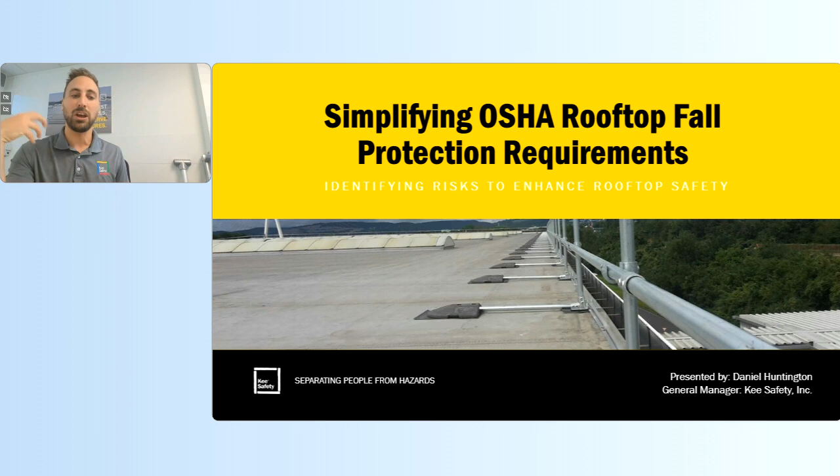And promise number three is that this is not a sales pitch. I am here to educate you. My goal is to give you the knowledge that you need to help separate your employees from hazards, specifically falls from height. If you work with us to protect those employees, that's great. But if you just take this knowledge and apply it, I take that as the win overall. So those are my three promises.

But what are our real learning objectives? What are we actually going to talk about? Well, I've climbed on a lot of roofs. I've been doing this for slightly over a decade. I'm not going to say how much over a decade, but slightly over a decade. And I noticed early on that it really didn't matter the type of roof that I was on. I kept seeing the same three hazards over and over again. If I was walking on the roof of a hospital or manufacturing plant or distribution center, I kept seeing the same thing. I kept saying the same thing and answering the same questions.

So we put together this presentation to address the top three most common rooftop hazards that I've seen, and that will exist on all of your facilities. We'll touch briefly on how to protect those hazards. So we'll address the hazard. We'll look at what OSHA says about it. We'll answer frequently asked questions. And then we'll talk about how to protect each hazard using some of our solutions.

And then the meta, kind of the overarching theme that I want everybody to pay attention to, is the order in which I present these hazards. As you walk away from this webinar, my goal is for you guys to all say, well, if I could do one thing to make my roof safer, what would it be? I want you guys to be able to answer that question specifically.

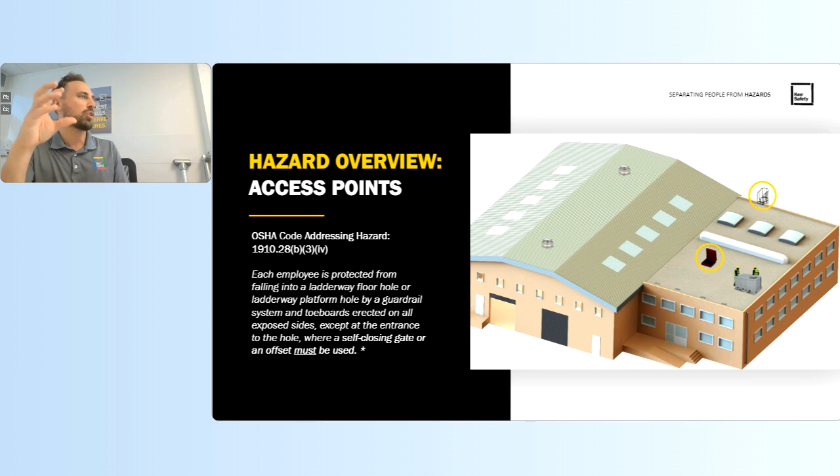And what you would most likely say is, hey, Dan, we've got some units near the roof edge. We really need you to protect them. And I would say, absolutely, we'll take a look. We need to protect those areas of your roof. But before we get there, the first hazard that I want to talk about on your roof is the access point. That's the first area that we need to address when it comes to fall protection. I'll get to why that is in a second. But first, let's just break down the code itself.

So where we pull this code, I'll give you guys a 20-second crash course in OSHA. So OSHA stands for the Occupational Safety and Health Act, or Occupational Safety and Health Administration is the enforcement branch. OSHA has basically two books. You have a general industry book and you have a construction book.

The hazards that you come across in general industry, which is the maintenance of the facility itself during its lifespan, are totally different than the hazards that you're going to come across during construction, right? We are in a facility here in Buffalo, New York. We don't do a lot of overhand bricklaying as a day-to-day part of our operations, right? And when you're doing overhand bricklaying, you're not really worried about ergonomics and lighting. So there's just two totally different books.

We're referencing 1910.28. The .28 means that we're talking about the fall protection chapter in general industry. So you want to Google it. I tell everybody, Google these codes and read them for yourself at OSHA.gov. Now, you may be watching and listening and say, oh, no, I think you're wrong. I think that the OSHA code is 1910.23. And you wouldn't be wrong. That was what the OSHA code used to be.

Back in 1977 to 2016, it was 1910.23. Then they updated the code, and now it's 1910.28. They didn't retire the jersey number, which really is confusing. So you can still look up 1910.23, which is now the ladders requirement. So that's your 20-second non-accredited crash course in OSHA and understanding the codes.

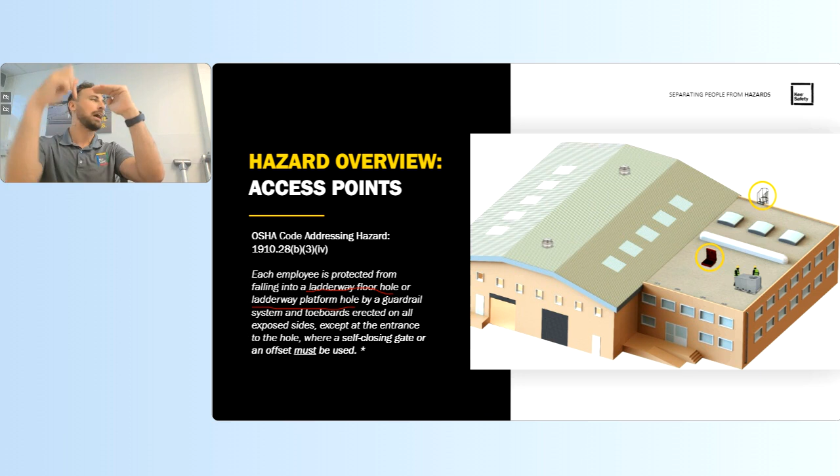A ladderway platform hole, the roof is a platform that I'm stepping onto and off of. It's my work platform. The fixed ladder on the side of the building is my ladderway platform. And the hole is where I'm climbing up and through the openings in the ladder to make access. So it's saying if I've got a hatch or if I have a fixed ladder, I need to protect it. I need to protect it by using guardrails and a self-closing gate or an offset.

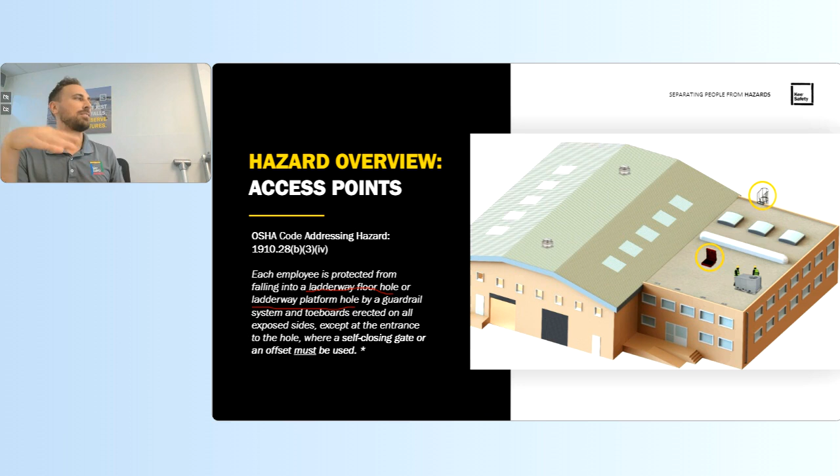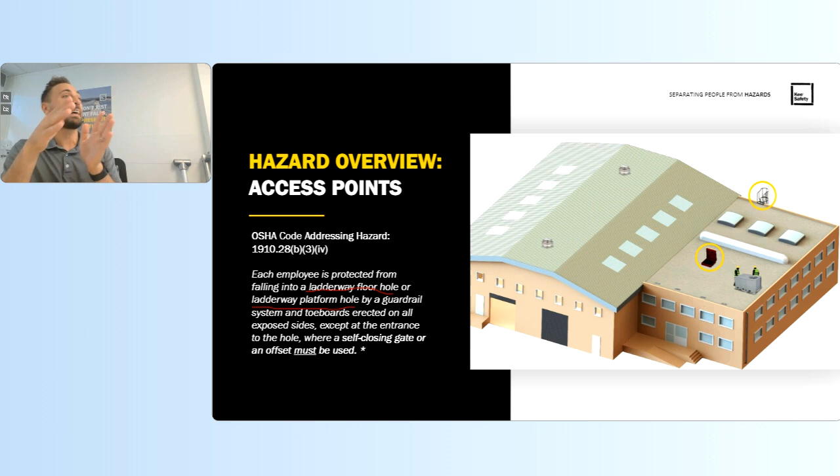Offset, simple to understand. Picture your guardrail as like a turnstile at a bank. So I can walk up to the guardrail, I turn right, I turn left, I get onto the roof. We also like to design these as like a cattle chute to the middle of the roof. So you have guardrails that bring you to the center of the roof. So that way I can engineer my footpaths from the middle out, so we don't have people walking along the edge and end up in a precarious situation. So those would be examples of an offset.

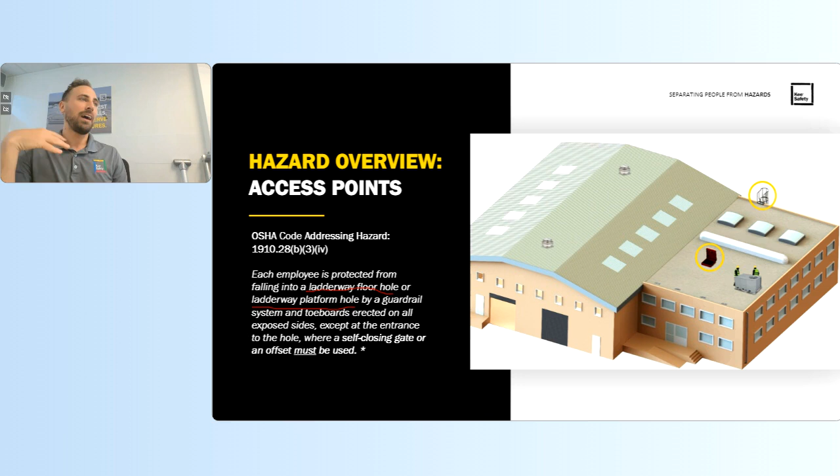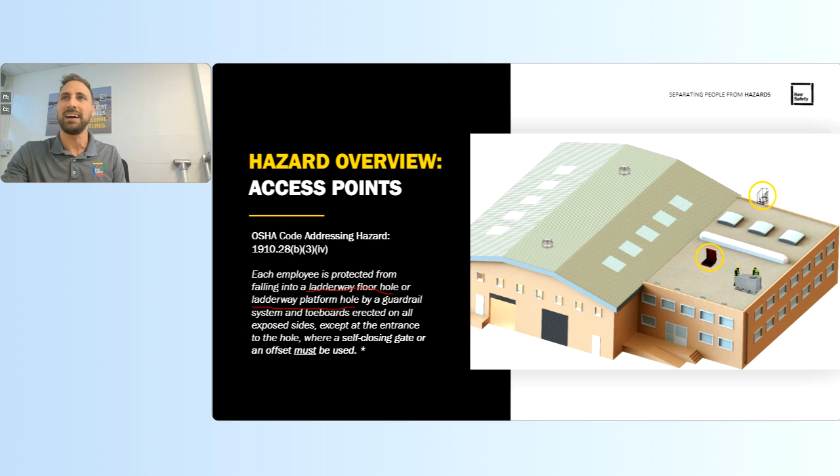The term self-closing gate is actually a very important nuance that I'll address in our frequently asked questions section coming up. But first, I have to tell you why. You called me, we're sitting in your conference room, and you want me to take a look at your leading edge. And I'm saying, yeah, but we got to talk about your hatches first. Well, why am I saying that? How do I justify that stance? Well, to understand that, we first have to understand how do you assess risk in the first place?

We all assume risks every single day, but we assume them to be an acceptable level of risk that we're willing to take. If you drove your car to work today, you accepted a risk of getting into a car accident, but you put controls in place to reduce the likelihood of an accident occurring and the severity of the accident should it occur, right? Like you drove according to the speed limit. You obeyed all traffic signals. That reduces the likelihood of an accident occurring.

You put on a seatbelt. You have airbags. That reduces the severity of an event should an accident occur. So we look at risk in basically two metrics: the severity and the likelihood. The tool that's used by the industry is called a risk assessment matrix.

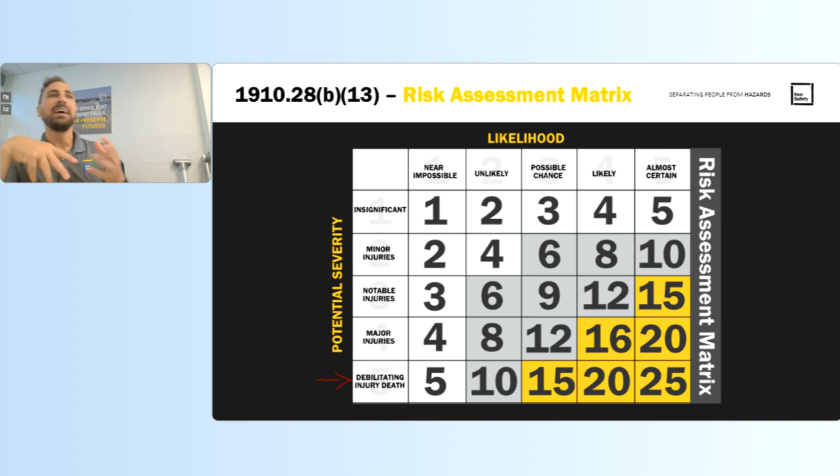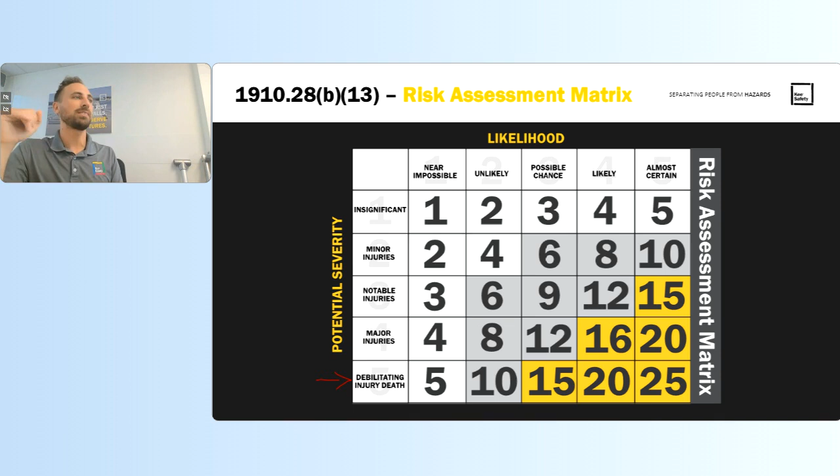The term likelihood gets kind of wishy-washy. It's kind of a subjective term. I like to listen to how people talk in facilities because I hear them when we're debating what areas we should protect, and they start to debate back and forth the likelihood of a fall occurring, but they use super subjective terms to rate likelihood, right? One of the most popular ones is, well, we've never had a fall. Nobody's fallen, and they always go, knock on wood, so we're probably okay. And it's like, yeah, if knock on wood's in our safety plan, it's not a good safety plan.

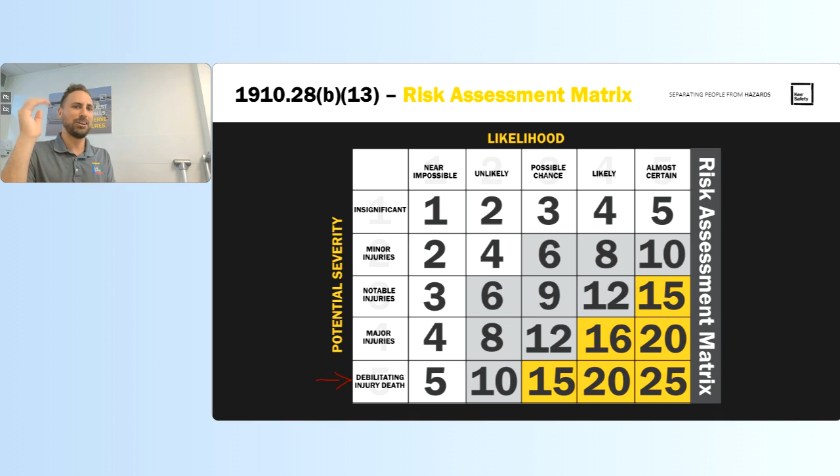I've had people tell me, I'm not scared of heights, so I'm not going to fall. I'm real sure-footed up there. And I'm like, yeah, man, that's not how gravity works. Like, you're not wearing gravity boots. You're not going to not fall.

I was in Texas, this is a true story. I had somebody tell me I could totally land this one. I'm like, no, man, you can't. We're like 30 feet up. You're not going to land this one. You're not a cat. You're not going to just parkour jump. There's a big difference between a jump and a fall.

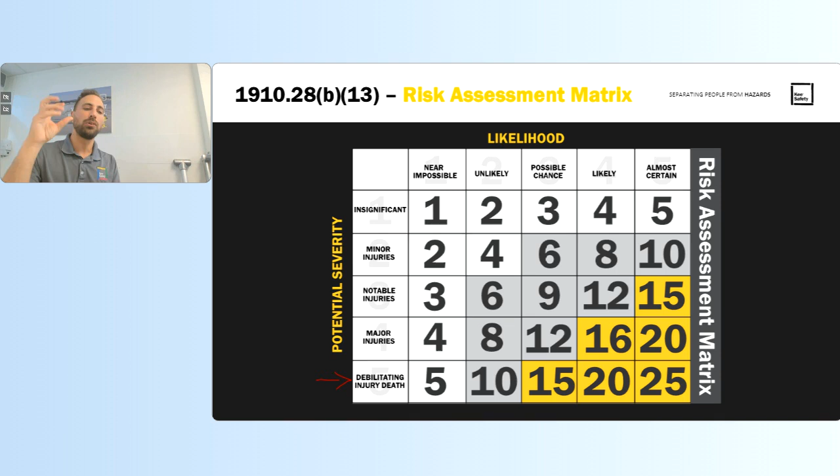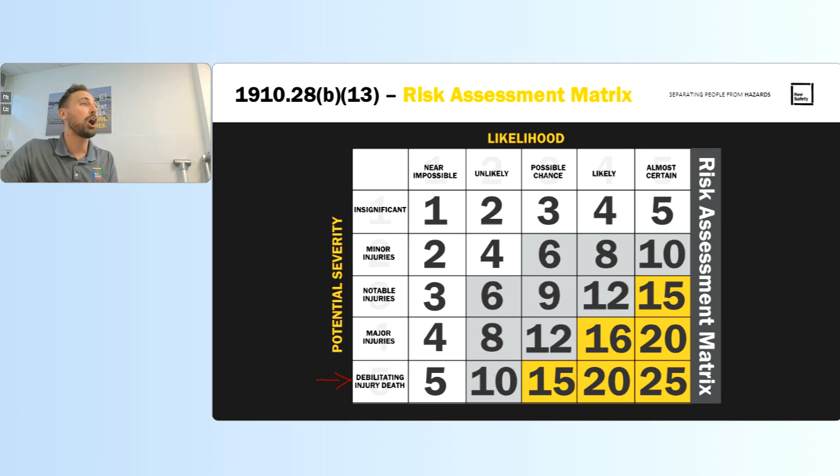So I actually don't like the term likelihood when we're talking about risk and rating risk. It's too subjective. So I like to turn it into something that's actually measurable, an objective measure. So let's take the word likelihood and change it to frequency of exposure to the hazard. The higher exposure count I have to a hazard, the more likely I am of an accident occurring, right?

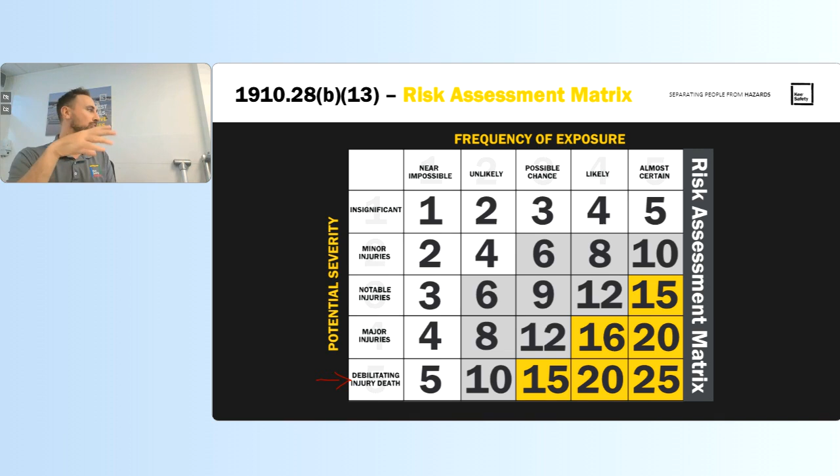Good example of this is swimming. Statistically speaking, you are more likely to drown in a swimming pool than in the ocean because we just spend more time swimming in pools. Pools aren't inherently more dangerous than the ocean, but the frequency of exposure at pools is way higher.

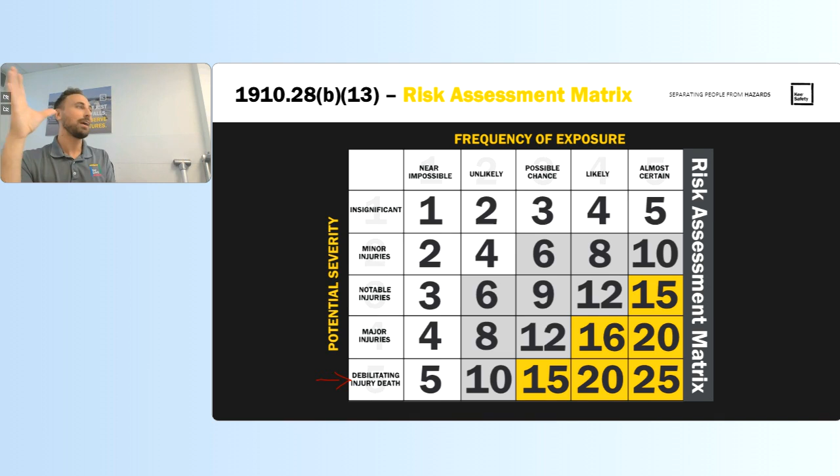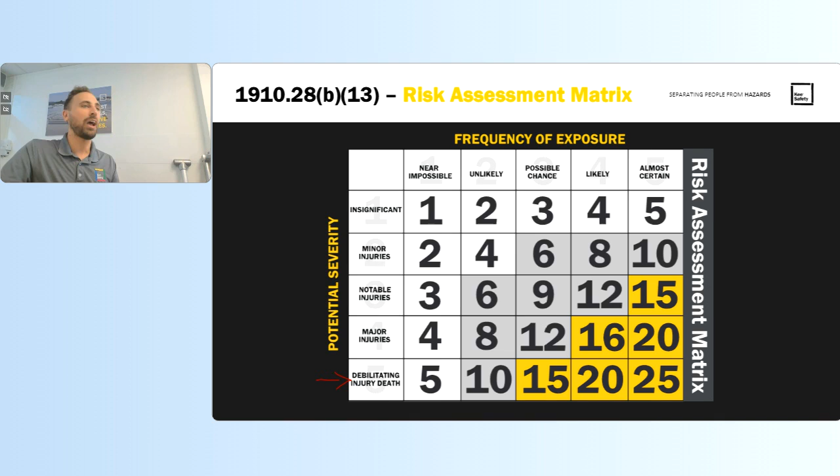It's an interesting statistic that you are more likely to get into an accident within 2 miles of your home than anywhere else. Well, guess what? Every time you leave and go home, you're within 2 miles of your home, right? The volume of your driving is within 2 miles of your home. So the frequency of exposure is an objective measure that we can look at when assessing risks on a roof, helping us prioritize hazards.

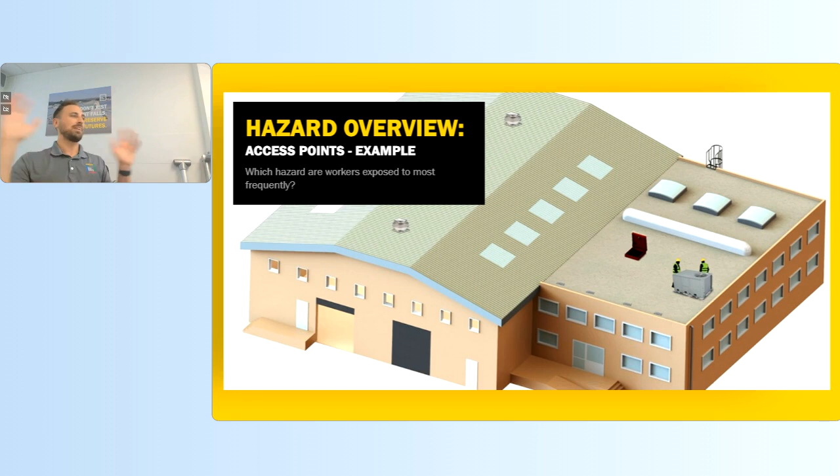So let's take this idea and apply it to a roof. Let's just do an example. Let's say in this example, our primary access point will be this hatch right here. We're just going to pretend this ladder doesn't exist. And on separate occasions, we can't stack trips. On separate occasions, I've got to service this unit twice a year. I've got some belts in there that need to be replaced every once in a while. I've got a motor with PMs. I'm up there at least twice a year.

Once a year, I've got to reseal these skylights because skylights leak. That's just what they do. So we're just resealing them every year. 4 times a year, I'm at this HVAC unit. We've got filters that need replacing. We've got equipment, belts, and PMs. So at least there 4 times a year. And then we've got drains along this edge, and twice a year, spring and fall, we're up there cleaning out the drains.

So the question is, which hazard on this roof has the highest exposure count? I'll give you guys a minute. A lot of times in classes, people say the edge, right? Because I'm at this edge 4 times. I'm at this edge 6, or 2. So really, this corner has a 6x exposure count, right? So that's got to be the priority. That's where we're there the most often.

The answer is no, because every time I come on the roof, I've got to come through my access point. So I'm going to hit my access point. 2 plus 1 is 3, plus 4 is 7, plus 2 more is 9. 9 times, right? Wrong. 18 times, because I also have to come back down through the access point. So my exposure count is much higher at my primary access point than anywhere else on that roof. So by hazard count alone, we say we've got to protect your access points. And it's a quick, easy win. First thing to start your journey in fall protection and get your facility up to compliance.

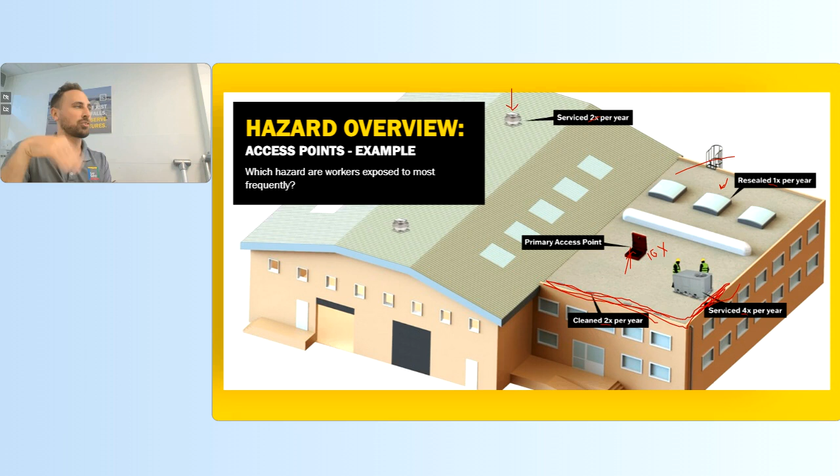Another reason I always like to say prioritize your access points, because I fall into the same trap when I do roof walks, and I've been doing them forever. What do you do at an access point? 3 of us are going on the roof. I climb up, I unlock the roof hatch, and I stand up there next to the hole. I wait for you to climb up. You stand next to me. Wait for the 3rd guy. We're all milling around this opening, waiting for everybody to get together. Then we say, all right, what are we going to go and do? And then we go and do it, right? So it's like a little milling point.

And then what do we do on the way down? You climb down the hole. I stand at the hole looking down to see if you're off the ladder. An exposed opening, and a fall protection expert standing right next to it. And then I climb down and you do the same thing. So it acts as a natural gathering point or collection point for people on the roof. Again, as an expert, I make that mistake all the time. I have to be very conscious. I get up on the roof, I walk 10 feet away from the opening, I stand there, I wait. You follow me. And we talk about protecting that access point.

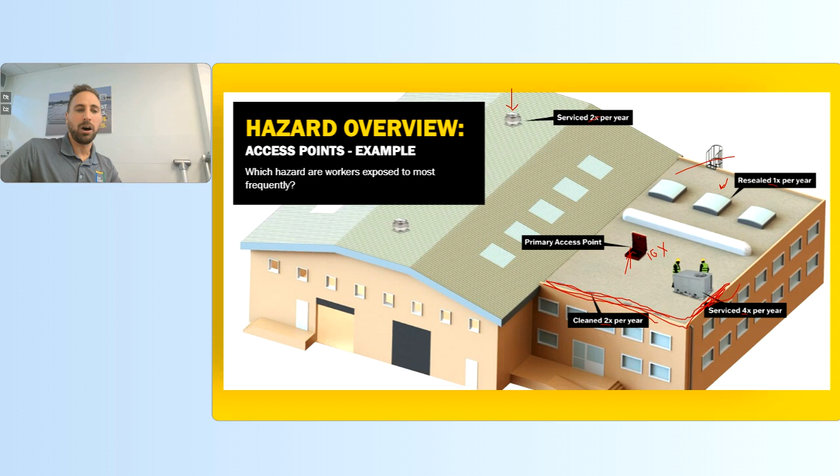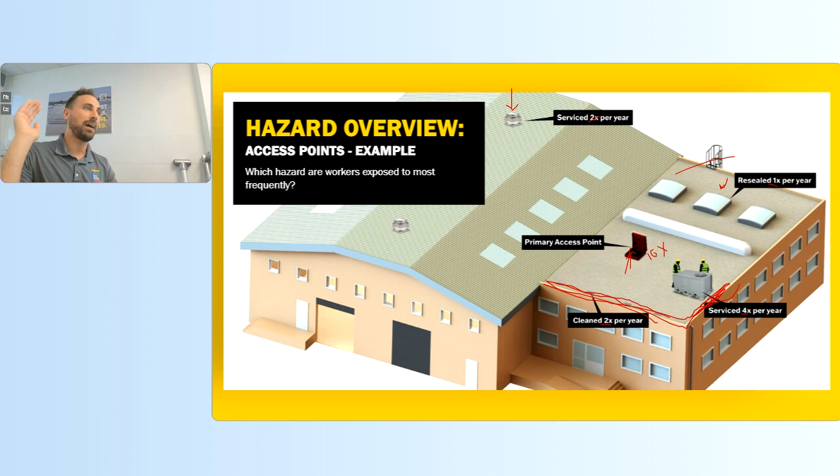Now, when it comes to understanding hazards, there's 2 factors, right? Time and exposure. So leading edge is still a critical area that needs to be protected, and we'll address it. But from an exposure count only, we're going to prioritize access points.

Frequently asked questions. The number 1 question that I get when it comes to access points is if I can use a chain instead of a self-closing gate. Where this question comes from is, back, I read you guys the code from 1910.28. If you were to go back in time and read that code pre the update, the 1910.23 version of that code, it would read almost identical to the original code, except for 1 term was changed.

The gate got changed from being described as a swing gate to a self-closing gate. And then in like 1982, 1983, a letter of interpretation was sent to OSHA where somebody asked the question, can I use a chain instead of a swing gate? You got to close the gate behind you. You got to reattach the chain behind you. It's the same, right? And OSHA said, yeah, you're fine. Use a chain. So everybody started using chains.

New code comes out. They call it a self-closing gate. And the question becomes, well, can I use a chain still? To answer that, where we pulled this text that's on the slide from, we have to dig into the Federal Register. So the Federal Register has the documentation of the justification for every change that OSHA made in the new code. And they address this directly. And they say, no, we don't consider chains to be an effective means of fall protection for 2 reasons.

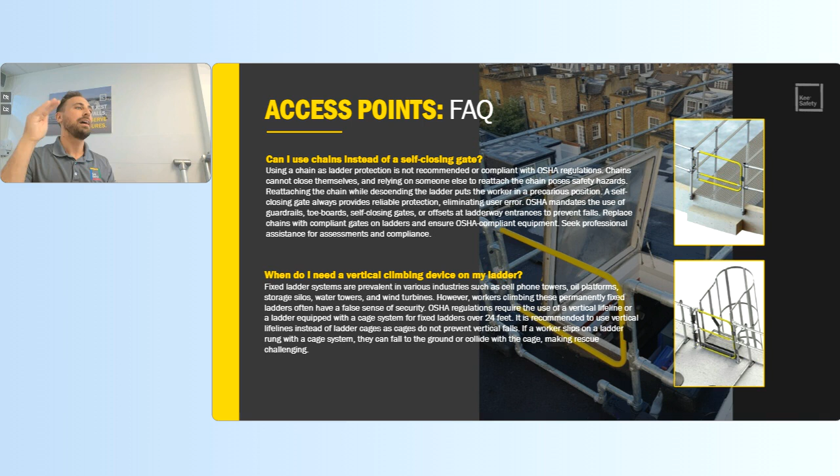If it's a newly installed ladder or a major retrofit on a ladder today, it needs to have it on it. And we have until the year 2036 to retrofit all ladders in the US with climbing devices if they're over 24 feet. And I heard somebody say it the other day. They were like, you might as well do it now because they're going to be really expensive in 2035. So do your retrofits now because come 2035, they're going to be off the shelves. Everyone's going to be sold out.

Other companies are addressing this by basically banning ladders. A lot of companies are going to stair towers, not using ladders whatsoever, because it's kind of a pain, because then you have a full PPE management program around the harnesses and the devices that you need just to climb ladders at your facilities, if everything else is safe with guardrails and things like that. So a lot of companies are just going away from ladders completely if they can, where practical.

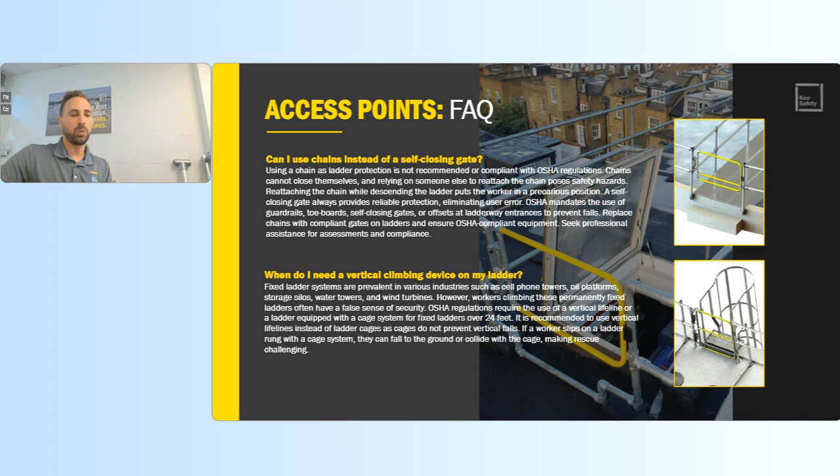As far as solutions are concerned, we provide a system called Kee Hatch. We put guardrail around the opening of a hatch. We integrate a self-closing gate. I like systems where we'll actually design grab bars as part of the system itself, so I have something to grab onto as I'm climbing out of that hatch to make egress a lot easier.

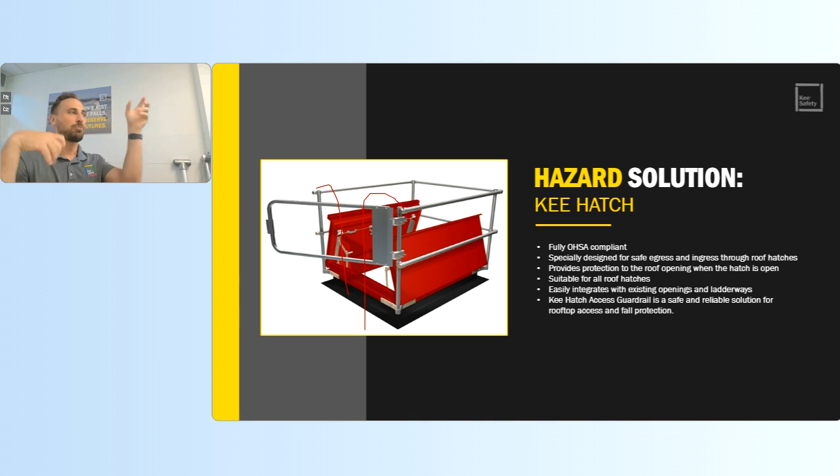There's nothing worse than climbing in and out of a hatch. I've done it hundreds of times. You got nothing to hold on to. You're laying on your belly. You're crawling out. Down south, you could fry an egg on the lip of that hatch because it's so hot. It's burning your arms. Up north, you're sticking to it because it's frozen. It's like the scene with the tongue stuck to the flagpole. It's just rough. So give yourself something to grab onto to make that egress easier.

Fixed ladders. We put non-penetrating guardrail either along the edge or, again, shooting into the middle of the roof to engineer your traffic away from the edge. And then we integrate the gate to the railing. A gate should never be mounted to a ladder. There's nothing worse than climbing a ladder, at the top of the ladder. It's hard to transition your body from climbing to walking. It's awkward to do that, and it's terrible when you got a gate smacking you in the face the whole time. You're wrestling with this gate.

Install your railing. It's on the inside of the ladder because it's sitting on the roof itself. We attach to the ladder, and then we put the gate 8 to 12 inches on the inside of that area. So you transition your body, you step onto the roof, your body pushes the gate open, it closes behind you. You shouldn't even have to touch a gate with your hands. That's a properly designed access point. So there shouldn't be any pinching, any wrestling, or any awkward behavior at the top of a ladder. If you see it, fix it. Because it's so bad when you're at the top of a ladder and it's smacking you, and you're in a very precarious spot.

Okay, so 1 of 3 down, everybody. We're good. I promise the next 2 will go faster than the first one. But that is the first hazard that I always like to talk about. So just take 20 seconds and think about your facility. How is it being accessed? Is it fixed ladders, roof hatches, stair tower, staircase, internal roof door? And where's the leading edge in relation to that opening?

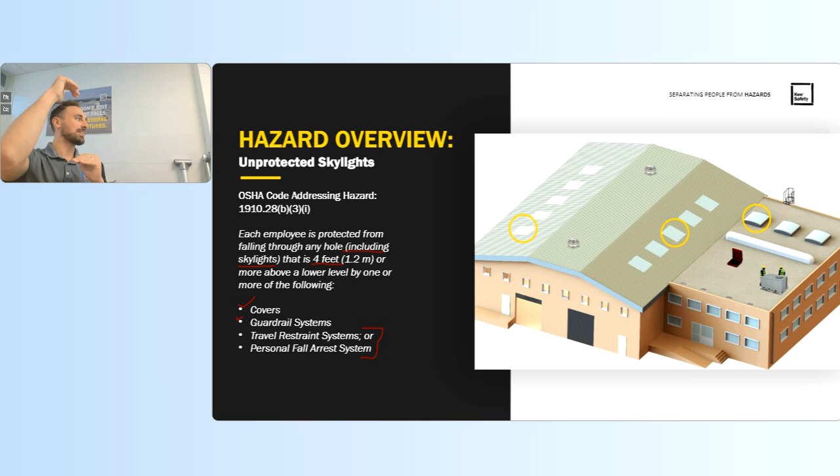So I might hit racking. I might hit electrical conduit or fire suppression line that's running underneath that skylight. There might be an office right underneath me. I don't know what my fall distance is. What happens to the people below the skylight when I fall? So let's say I've got fall arrest. It's fine. I'm just all cut up and bleeding and hanging from the ceiling, but I'm fine.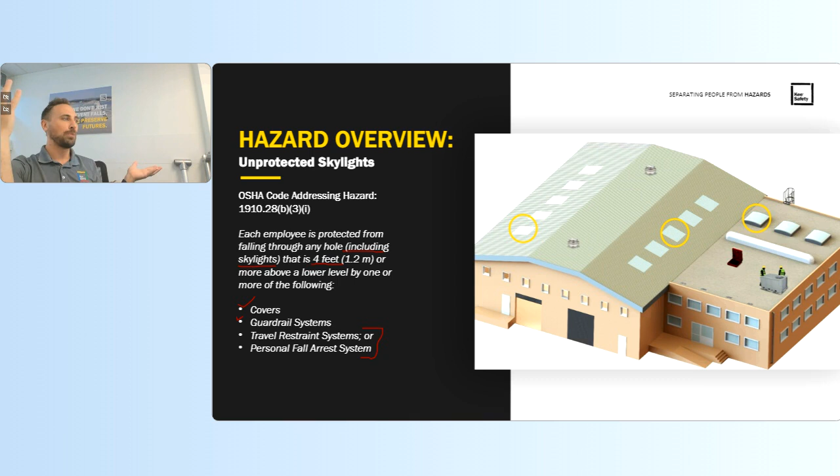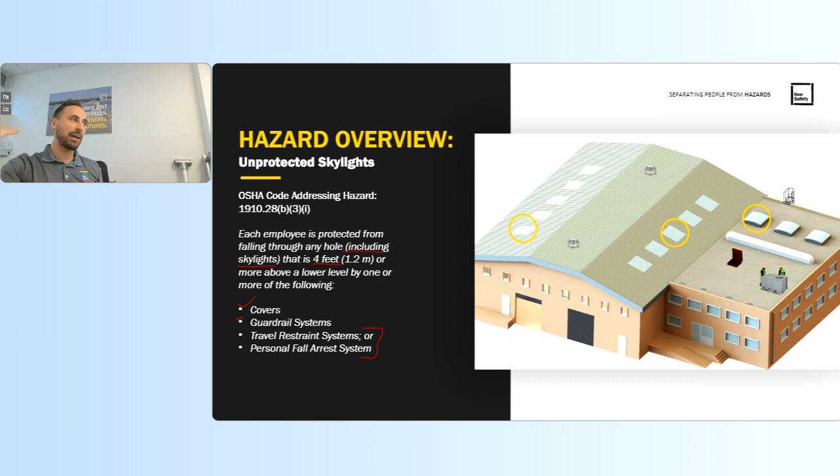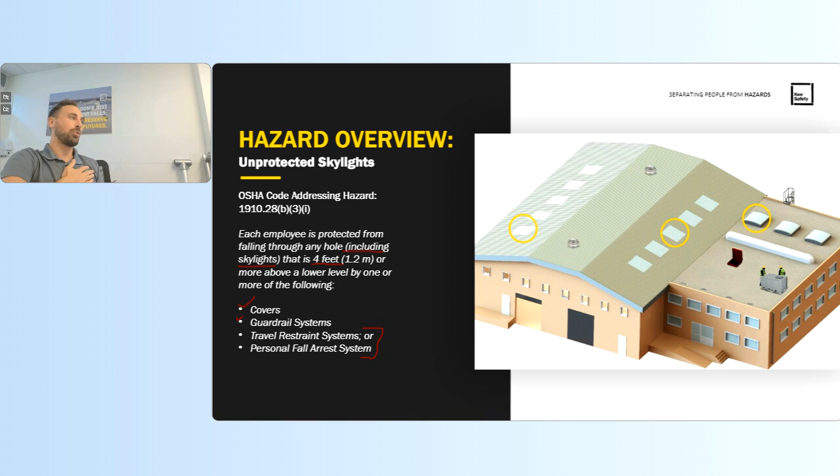And overall, what happens to the people below me? Well, they're going to get hit by all the shards that I just broke. Plus, I'm going to be bleeding, so we have biological contaminants in that area. What if it's a food manufacturing plant or a clean room environment underneath me? That's a batching issue. We got to clear that entire batch out, clean out the whole facility. That's a big, big problem. But we met OSHA, right? So it's important to consider OSHA as our bare minimum safety requirements. We can use fall restraint around skylights. I personally don't recommend it for all the reasons that I just explained.

Frequently asked questions when it comes to skylights. Number one misinterpretation and misunderstanding around skylights is that skylights are fall rated. Everybody for some reason tends to think the skylights are rated for a fall. The answer is maybe they were when they were manufactured, but probably not. The reason I can say that they're probably not fall protection rated is that most skylights are made out of plastic. Skylights are very simple to make.

You get 2 pieces of plastic, you warm them up, you put like an argon gas, like a thermal barrier gas in there, you put air pressure in it, it bubbles up the top, you let it harden, there's your skylight, right? You got a nice little bubble dome on it. Well, what happens to plastic in the sun over time? It's something called UV degradation.

And the example that I like to use, which I've recently been told dates me because people don't use this anymore. But when I was a kid, the white plastic lawn chair, everybody know what I'm talking about? You leave them outside for like 2, 3, 4 years, right? Picture you're at the family barbecue in the summer. You got a plate full of food. The only seat left is that cloudy white plastic lawn chair. And you got to sit down in it.

And you just feel it creaking as you lean back and the legs just shatter. Food's everywhere. That's UV degradation. That could hold you last summer. This summer it doesn't. Not because you ate too many hot dogs, because of the sun, right? It's the sun's fault. It makes you feel better. So it's the same idea with skylights, they're in the sun all day, every single day. They're getting more and more brittle. I've seen skylights I could put my hand through just from the sun eating away at them.

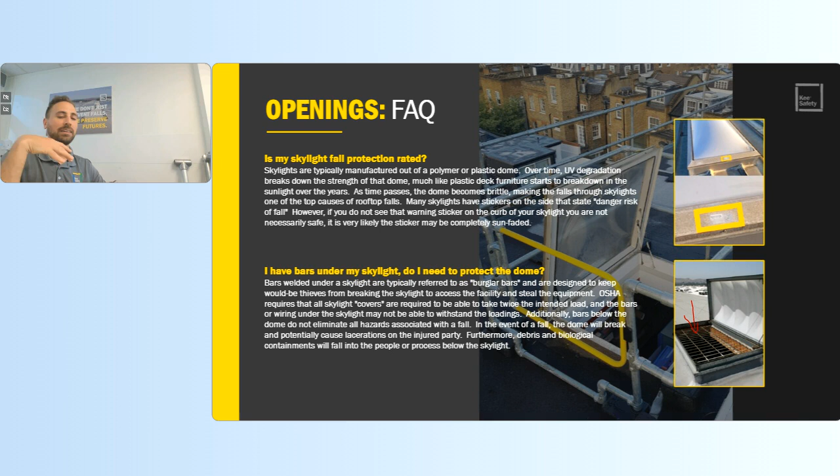And then last question, a little bit more rare, but every once in a while we'll see a bar grid underneath the dome. And the question is, well, are those fall protection? The answer is, we have to understand what they're for. They're not designed for fall protection, right? Because they don't stop me from breaking the dome. And they may or may not be rated for 2 times intended load, which is the OSHA loading requirement for a skylight cover. Those are designed as burglar bars.

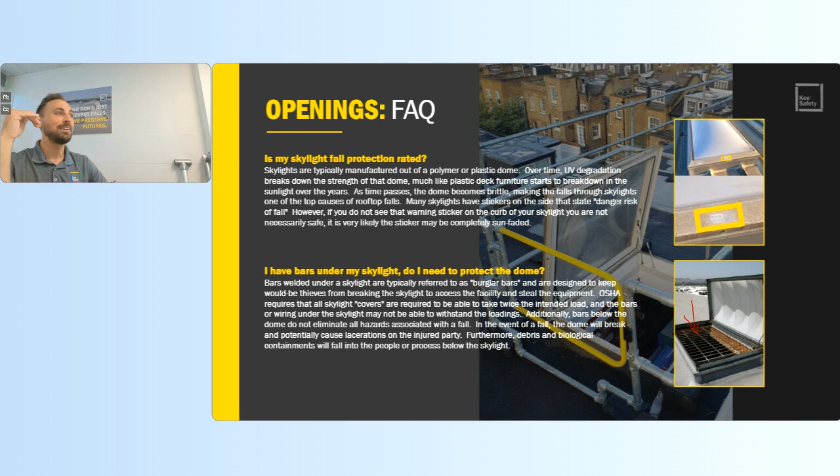So if you want to see one of these in action, go to Walmart, go to Home Depot, go to Costco, look up. You're going to see bars underneath their skylights. It's so a would-be cat burglar can't grab a ladder, climb up the building, smash the skylight, Mission Impossible, zip line down in, grab a couple of DeWalt drills, a few Milwaukees, rip them up through the skylights and disappear into the night. That's what they're there for. They're not there to keep people from falling. They're theft protection. So the reason why we don't consider those is because it doesn't eliminate all the hazards.

So even assuming it held you, if you were to fall, what happens to you when you hit and break the dome? You're still cut up. You're still majorly injured. What happens to people below the dome? We still have the struck-by and the biological contaminants as well.

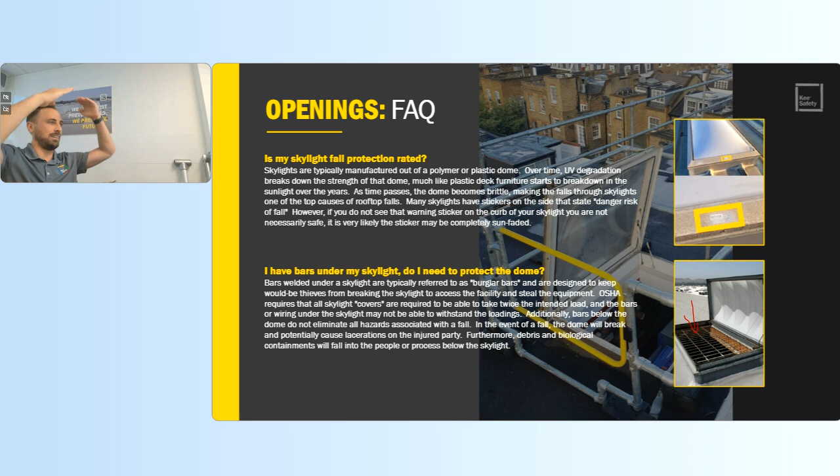Skylights, we get questions. We literally got a call, I think it was the fall of last year. A school called us up in the Northeast, and they said, hey, do you guys sell skylight protection? We said, yeah. What's up? Well, we have students that broke onto the roof, and they were using the skylights like trampolines, because if you jump on the plastic, it goes concave, and then it pops up. It would launch them. And they were taking turns to see how far they could get launched until one fell through.

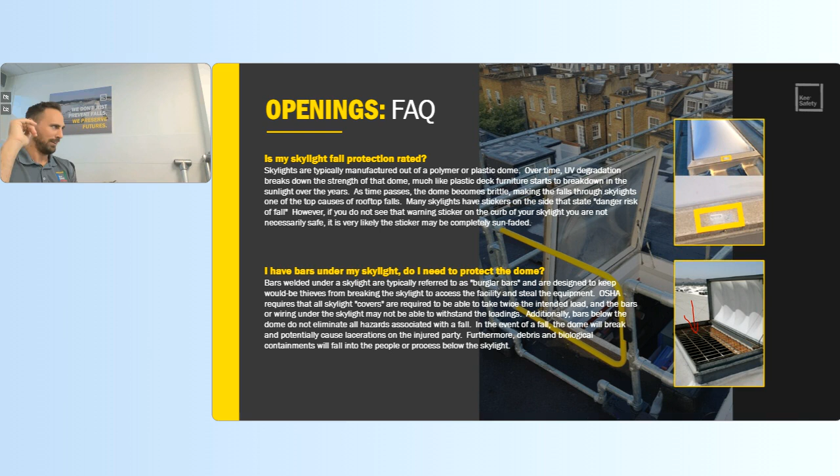And it was over the gym. It was a 30-foot fall. But by miracle, for some reason, they had folding tables out in the gym, and he landed on the folding tables enough to break his fall, and he didn't get a serious injury. So think about the craziest things around skylights. And they were like, yeah, we'll overnight you them. That is a crazy scenario to have.

So the way that we protect skylights, we put screens over them. We do a non-penetrating screen. We box out the curb using tension. We set the screen inside of this channel, and then we lock it down with the clips. And then that way we keep people from being able to break through that dome.

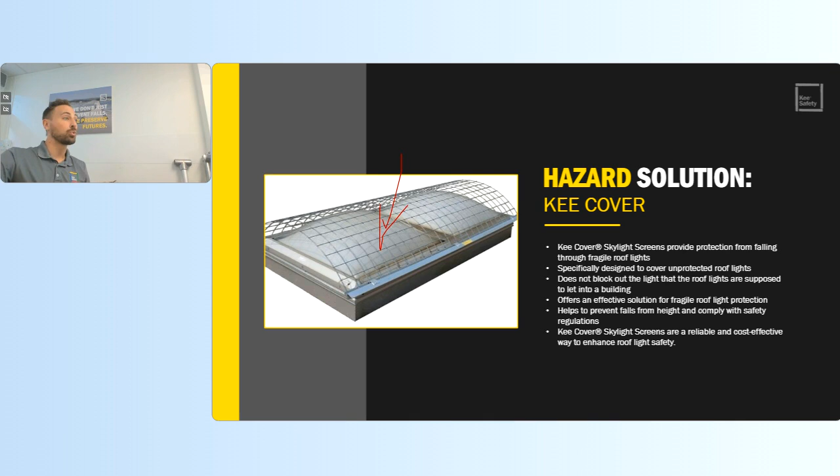Sometimes we can't do a cover because of the size or shape of the skylight, or because grid shadowing is an issue. So we end up using guardrails. We'll do a non-penetrating guardrail to box out the curb. So that way I can maintain my 200-pound load compliance at that top rail while still keeping people safe from falling through.

So think about your facility. Again, do you have skylights? I'm a big fan. You can eliminate them. You can roof over them. You can't fall through a skylight that doesn't exist, obviously. But if you have them, I like the natural light. I like getting LEED points. I like reducing the use of carbon, electricity inside the facility. I think it's great. But if you're going to do it, do it safe, right? Let's have it be not a hazard on our roof.

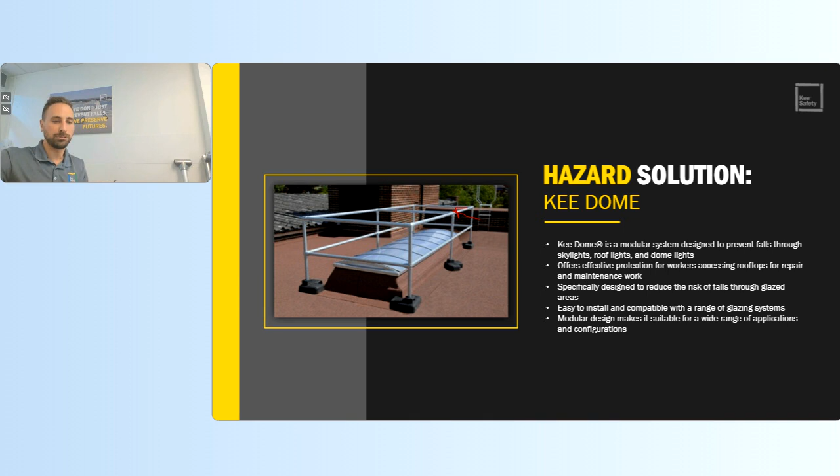But finally, we are at the leading edge. So to understand the leading edge, we look at 1910.28(b)(13). And OSHA breaks down the leading edge into zones. So we have 3 zones that we're going to look at, starting from the edge of the roof and working our way into the middle of the roof. The first zone that we'll address is zone 1. So this is work being done from 0 to 6 feet from the roof edge. The way I like to think of this is we are less than 1 body length away from the edge for any work being done in this area.

A lot of times we talk about slips, trips, and falls as 3 different buckets of injuries, right? You have slips, trips, and falls. But a lot of times you can have a slip that turns into a trip that turns into a fall. It's a series of events. And in that series of events, we're actually going to move, right? Nobody actually does the mummy trust fall backwards, right?

What do you do? You step backwards, you trip over a tool or something like that in your work area. You take 2 steps to try and catch your balance. You don't catch your balance, and then you fall, right? And if you took 2 steps, you traveled about 4 feet. And if you took 2 steps towards the edge and then you fall, your center of mass is over the edge. So the most innocuous, basic accident in this zone can prove fatal.

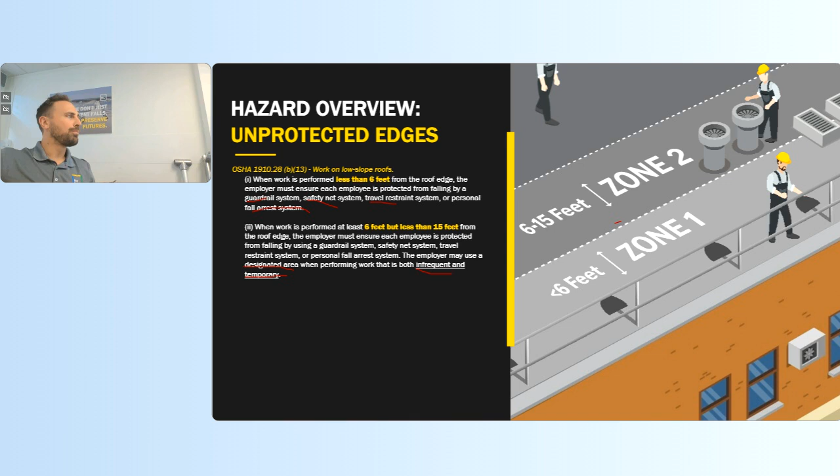And then it goes on to say that the employer may use a designated area when performing work that is both infrequent and temporary. So we have 3 new words that we need to learn. What is a designated area? Well, according to OSHA, a designated area is a line, a warning line system, telling somebody that they're going to go into a dangerous area.

So what does that mean? Well, to find that, we have to go into the Federal Register where OSHA discusses this. So according to OSHA, infrequent work is work that is sporadic or done as needed, once a month or less according to federal OSHA, once per quarter or less according to Cal OSHA. So federal is a little bit less stringent, Cal OSHA is a little bit more stringent. That's typical. Temporary work is defined as work that takes less than 2 hours to complete in a single trip.

So you go up, turn the machine off and on again, you pull the filter out, you bang it on the roof, jam it back in there. That's temporary work. You go up, you plug in your machine, you run a diagnostic. Oh, it needs new plugs. Okay, go down and get the plugs and the tools, come back up. That's not temporary work because it's 2 trips, right? So those are the nuances that OSHA is kind of trying to explain here.

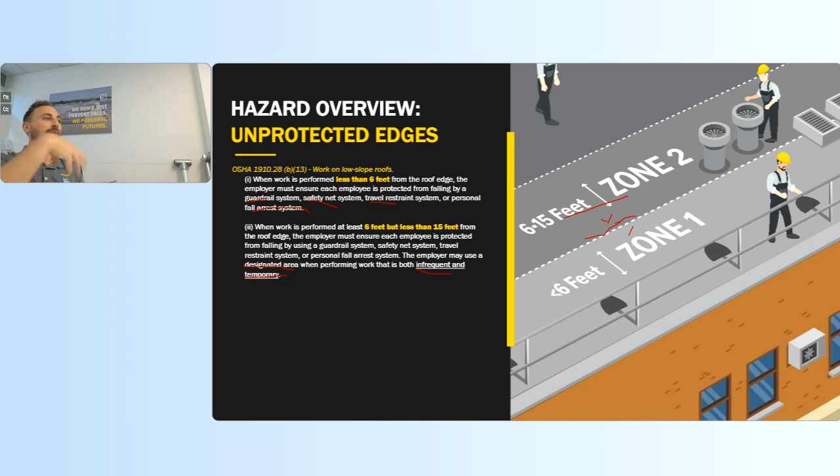Logically, I want at least enough room for me to take 2 steps, lose my balance, fall, and my center of mass is still in the middle on the roof with room for me not to fall off the edge. Then the third zone is 15 feet or more. So now, listen, we are 2+ body lengths away from the roof edge. So I need to slip, trip, fall, somersault, then get my center of mass over the edge. So I'm feeling pretty confident in this area personally, and OSHA wrote the code to match that.

It states that when work is performed 15 feet from the roof edge, the employer must protect each employee from falling by use of guardrails, safety nets, travel restraint, fall arrest, or a designated area. The employer is not required to provide any fall protection, provided that the work is infrequent and temporary, and we implement and enforce a work rule prohibiting employees from going within 15 feet of the roof edge. Key term here is implement and enforce, right?

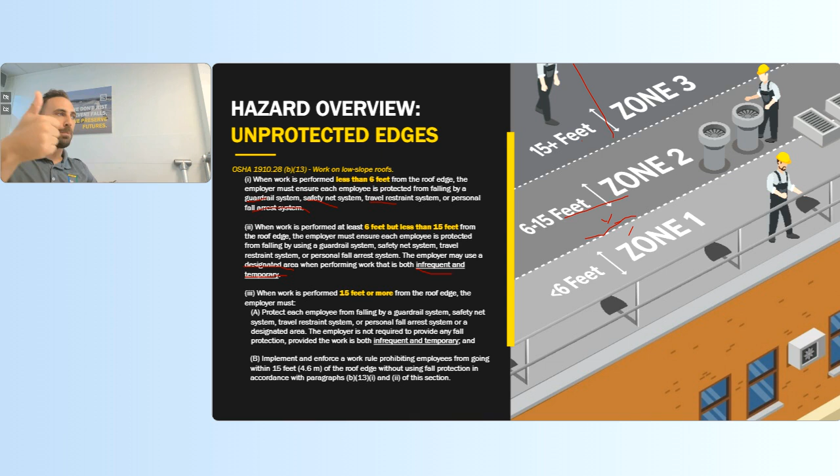You can't just say, you got a 15-foot rule. Yeah, okay, what's your fall protection? 15-foot rule? Well, what does that mean? It means 15 feet. Don't go within 15 feet. Well, the unit's within 6 feet of the roof edge. Well, yeah, just don't do that. Yeah, how, right? There's no solution here for me.

Enforceable is all of our walk paths are designed to be at least 20 feet away from the roof edge. We have a warning line system at 15 feet away with temporary anchor points that you can move around the roof. If you have to go beyond that warning line, you have to tie off to an anchor point. Or any unit within 15 foot of the roof edge has guardrail around it. You're not allowed to go anywhere closer than 15 feet unless you're behind the guardrail.

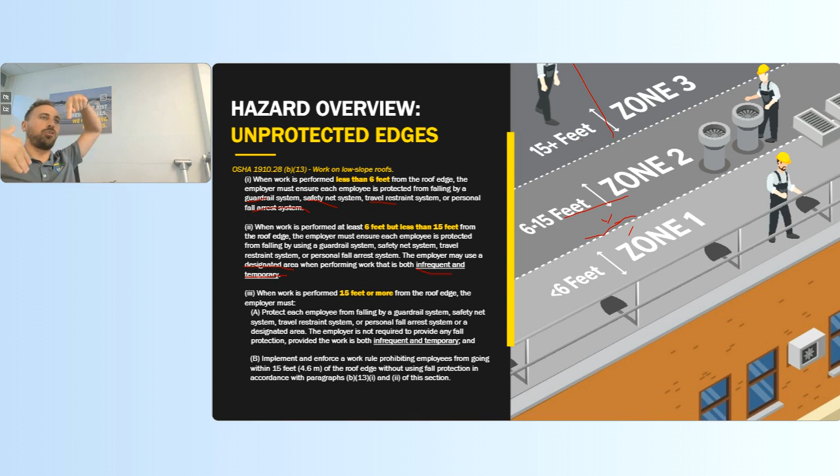A lot of what we do is we do like U-shaped systems. We corral our units because, again, we want to engineer the traffic to always flow center, flow away. So we don't like to just put straight guardrail along the edge, because I'll go from that unit, walk along the edge, then go to the next one, and walk along the edge. So we like to U people in, engineer traffic to the middle, walk across the middle of the roof, then back out to the edge.

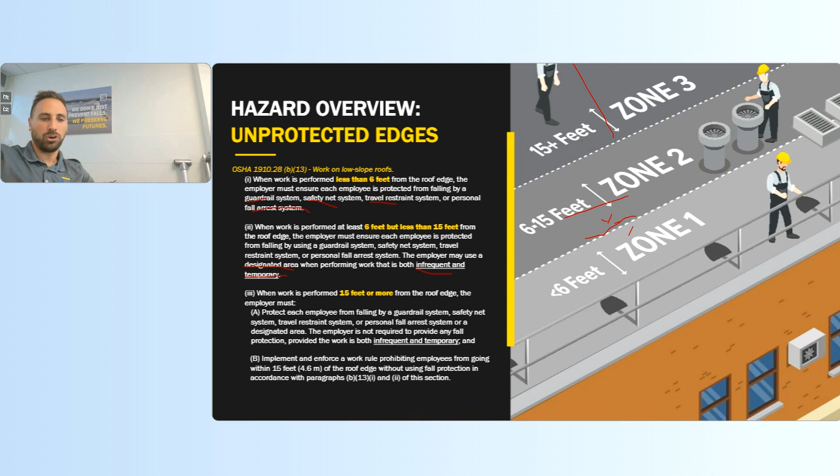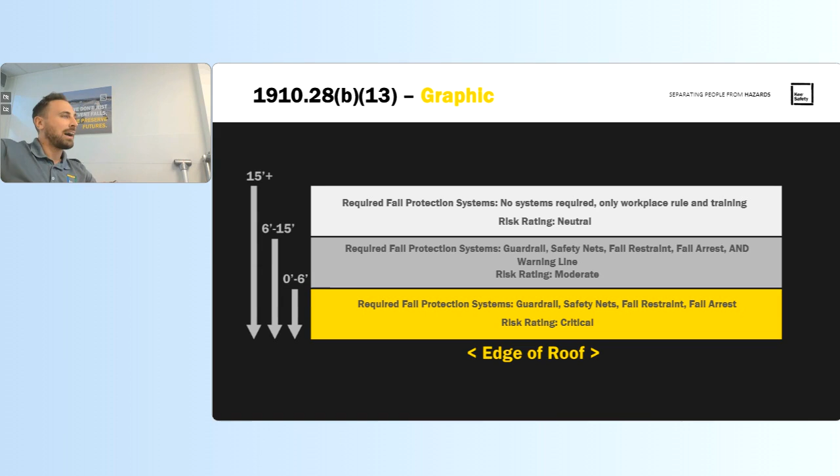But enforceability is the key here. And you have to have systems that back up your design and then your enforceability. Just a quick graphic. We're almost to the end. Talking about the closer that we get to the edge, the higher our risk rating. So therefore, those are the areas that we're going to prioritize protecting, right?

If we take that same risk assessment that we talked about earlier, we replace likelihood of falling with distance from roof edge. It falls right along. The closer we get to the edge, the higher the likelihood of a fall occurring is, the higher the risk rating, the more critical, the higher the priority is for us to protect those areas. So when we come out and do an assessment, we're looking at access points, openings in the roof, and units starting from the outside in. And that's how we prioritize kind of tackling your roof.

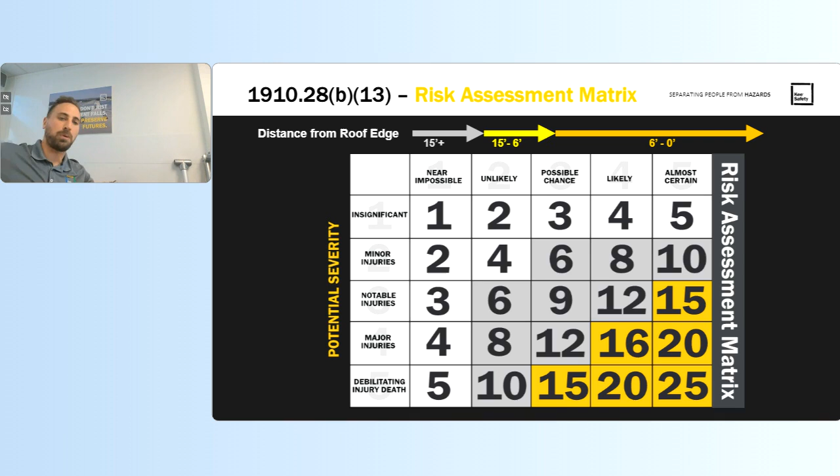The way that we protect the roofs, again, we'll put a non-penetrating guardrail along the roof edge. We'll do corral systems in. If you need a demarcation line, we have a non-penetrating demarcation line. A paint on the roof is not a demarcation line. The Federal Register, OSHA's super clear. 8 months out of the year in Buffalo, it's snowing, so you don't even get to see the roof, so you won't see the line. They are very clear. It has to be a physical barrier, 39 inches tall, sag no less than 34 inches, visible from 25 feet.

Last kind of concept I want to leave everybody with, and then we'll jump into questions, is the hierarchy of fall protection. It's an adapted version of the hierarchy of controls. And so what this says is there's a bunch of options that OSHA gives us, right? But what's the best option? And how do you measure best? So OSHA says we can do guardrails, I can do safety nets, I can do anchors, restraint, arrest, but what's the best option to do?

So the way that we rank best is by the amount of risk that we're mitigating for the user and the owner, right? We want to reduce risk to as low of a level as we can. And we start on the top of the hierarchy and we work our way down. So this is the hierarchy. And then to the right, we have an example of an unprotected skylight that we're going to apply these principles to.

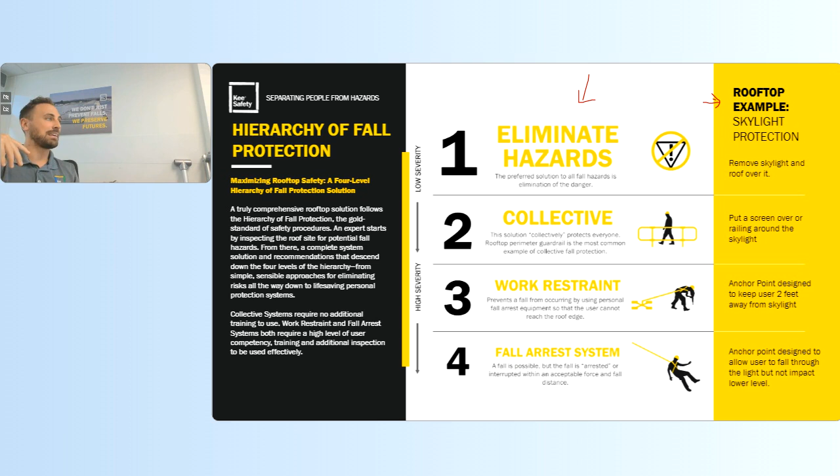So now we have somebody who's fallen and we need to rescue them in under 15 minutes before suspension trauma sets in, right? And we end up with somebody hanging on the side of the building. They have blood pooling in their major arteries. They're probably unconscious from the whiplash of the fall. If we get them down in anything more than 15 minutes, we introduce high likelihoods of cardiac arrest, stroke, aneurysms, major health issues. So we need to have a rescue plan.

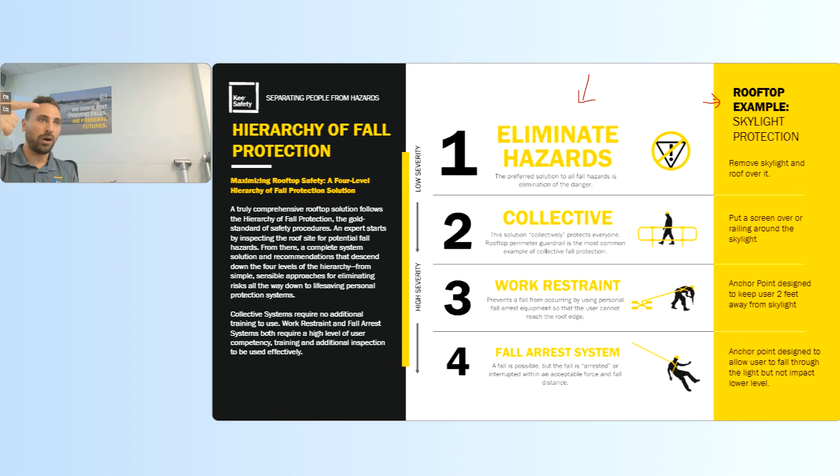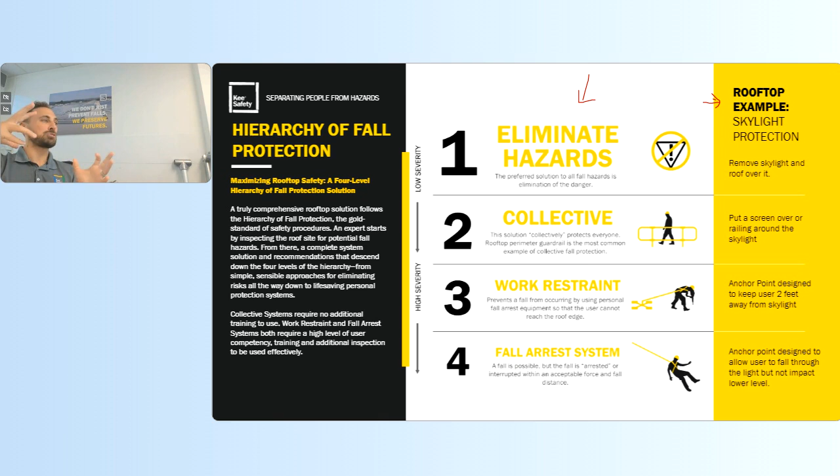We need to know that somebody actually fell, how to get them down safely, and then what the next steps are. So again, as we're talking about risk, what's the best option? We want to eliminate as much risk as possible. And that's really what we're here to do. As I said in the beginning, we are here to help you mitigate risk. We're here to educate you.

They are death traps. For anybody who doesn't understand, you have a flat metal roof, and then you have a panel that looks like the rest of the roof, but it's a skylight made out of fiberglass. You have any snow on it, you can't see it. A lot of times they'll end up doing a galvalume spray to extend the lifespan of the roof. You spray it, you basically paint the roof. They paint right over it, so now it looks exactly like everything else, and you're going to fall through it.

OSHA, the way they address it is they call it a hole in the roof that must be protected by the use of a cover. So we have screens designed for those systems specifically. As a personal recommendation, before we do any roof walk, we have to ask, are there skylights on this roof? And if it's a metal roof, I want to go underneath it and look to see if there's any open

panels to avoid. And if I'm going to walk a roof like that, I walk the peak only, because the skylights don't typically go all the way up to the peak. They're in the middle of the roof. Yep. So yes, they're death traps. They're terrible.

Well, let's talk about other people on the roof, in particular contractors. Randy wants to know that if we use contractors, do we have to protect them, or does their company have to protect them in these scenarios? Good question. I always preface this question by saying I'm not a lawyer.

I do not offer legal advice. Please consult a lawyer. So the onus of liability falls on the building owner, and there's tons of cases where the owner is liable. Now, when you go to a lawsuit, it's all about shared liability, right? So the lawyers are dividing up who has the most liability. So both are responsible, the employer and the building owner. But you are going to be seen as the primary responsible party for anybody on your roof.

And if you say, be safe up there, and you have no measures for them to be safe, you have no anchor points, no guardrails or anything, they would say, well, we tried to be safe, but we didn't have any reasonable means of tie-off. And so therefore you're liable. So the owner is the ultimately responsible party.

Okay. And keep your lawyer hat off or nearby, and maybe your OSHA hat also nearby. Talk about OSHA regulations differing from state to state. How do you speak to that? I know you were talking about Cal versus US and all that stuff. What's the best way to kind of create that hierarchy for our audience?

Good question. So federal, if you have a local state code, the local state code can be more stringent than federal, but not less stringent than federal. So Cal OSHA is much more stringent than federal. Most states kind of just adopted the federal code as their own. Like Washington State has their own OSHA. I believe that Minnesota has their own OSHA, but there's only minimal nuances between the two.

But then local building code can be even more stringent than state code. So you can get into local, like IBC codes and things like that, that have even more stringent requirements that you have to be aware of. But for the most part, people adopt federal all the way down through.

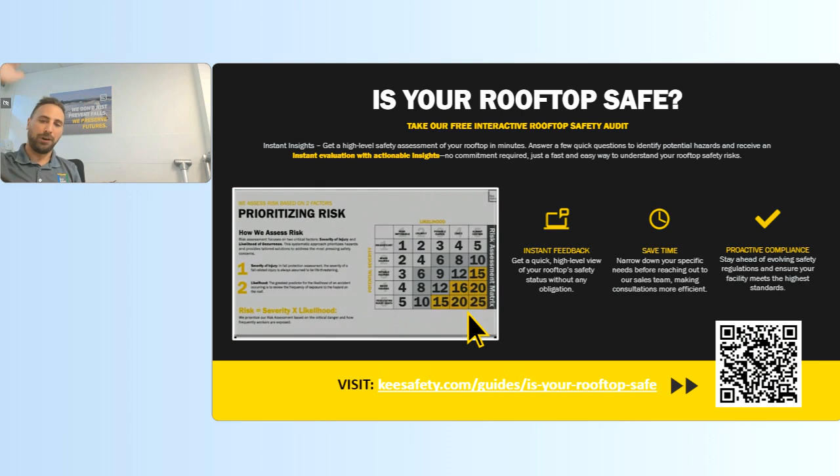Okay, that's helpful. And for everybody on the call, thanks for staying on. Dan, we probably have a few more questions. Do you think we've got time? Yeah, I'm on as long as you're on, no problem.

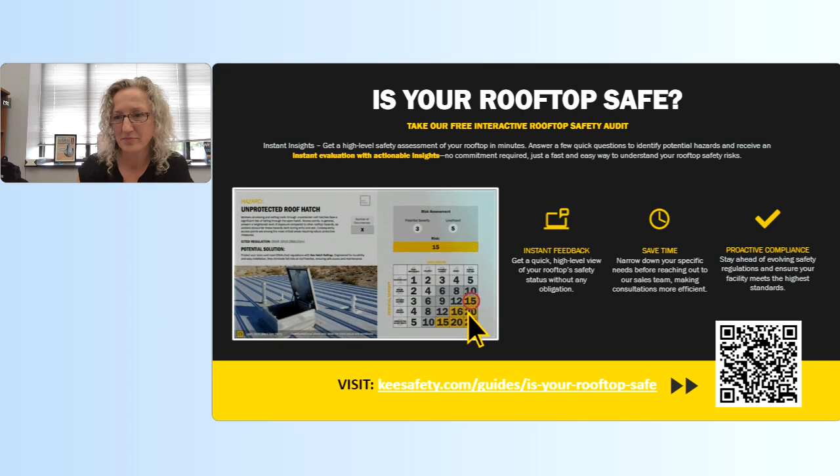All right, let's go. Paul wants to know about alternatives to ladders for accessing rooftops. Any recommendations? Yeah, so for low-level climbs, I always like to introduce stairs, stair towers. It's really hard to maintain 3 points of contact, especially if I need to get equipment up on the roof. I can carry a box of filters up a roof while walking upstairs. Typically on a ladder, you're going to climb, then throw a rope over the edge and try and lift your filters up while you're standing next to an exposed edge. So you have that secondary hazard related to it.

A lot of times you'll see a ship's ladder, which is just a really steep staircase. You have to treat them like a ladder. So they have to be protected at the top with a self-closing gate, just like a ladder would be. Anything over 50 degrees is considered a ladder, not a stair. And then stair towers, we're seeing that integrated quite a bit as well, kind of the alternating treads going up and down.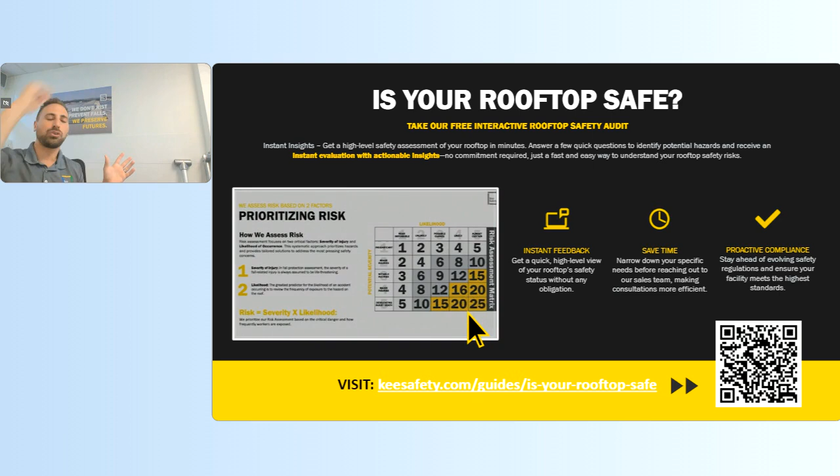I think the bigger theme is really think critically about how many access points you need on your roof and control them. So do I have a hatch? Do I have a staircase that I can use to get onto my roof? And then we have a random hatch. Go bolt that hatch shut and force everybody to use the stairs. Maybe they've got to walk an extra 20 feet when they get up there, but it's better than having an unnecessary hazard on your roof. So eliminate the hazard by just bolting it shut and forcing people to use the safer access.

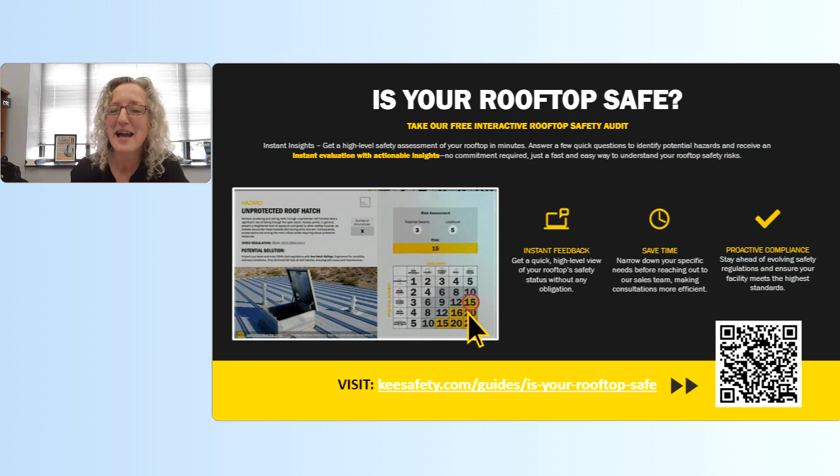Okay. Cameron asks about permanent roof anchorage versus temporary. As a government agency with less than optimal internal maintenance, may I assume installing permanent anchorage on our building roof is not optimum, meaning it's better for maintenance contractors to implement their own temporary fall protection anchorage? What's your view of that?

Yes. It's a complicated question without knowing the exact situation, right? There's a difference between permanent and permanent non-penetrating. So you can have an anchor on your roof that you can move around the roof, that people can move, set up in their work area, tie off to, and go work, so we don't have to poke holes in your roof at all. It doesn't need the 5-year pull test requirement because it's a pre-engineered system. So you don't have to worry about as rigorous inspections on it.

That's a better system than just saying, well, you got to get your temporary anchor point up there. Well, they're really heavy. They're a lot of metal. So it's hard sometimes to get temporary anchorage up onto a roof and set it up. So it would be better to have a non-penetrating permanent anchor waiting for them.

Okay. And I think you may have, as you answered that, partially answered or maybe fully answered Brent's question. You have buildings without anchor points. What can I do to provide those? What is available post-construction? Yeah, I mean, non-penetrating permanent anchor points. You can also do non-penetrating permanent horizontal lifelines. So connect those together with a traveler, with a pass-through, so I can walk along the edge, are really good options.

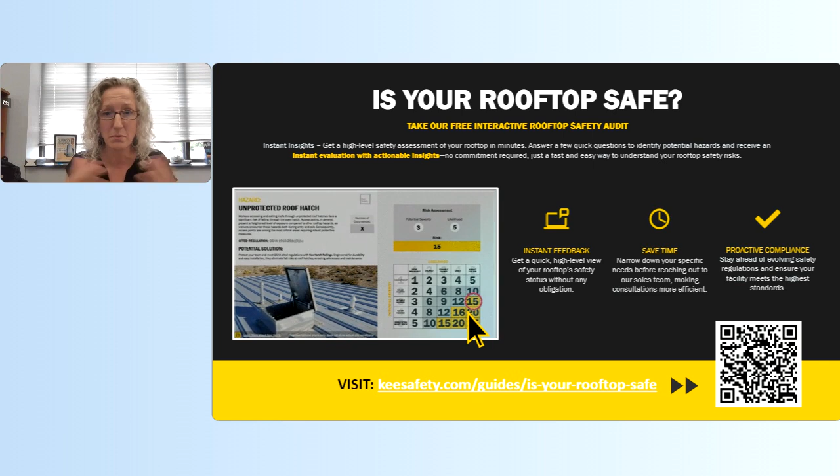So just to put my mind at ease one more time about these darn skylights, can you comment on managing those challenges around the rooftop solar structures? One more time, let's talk about how that all comes together. And maybe from there, also some parting thoughts, Dan, on next steps for our audience today, where they should kind of move forward in evaluating their own roof safety programs.

Yeah, great question. So we didn't even address solar. So I'm really glad that you brought it up. So again, talk about engineering your walk paths on your roof. How are you getting from point A to point B and back again? When we introduce solar onto our roof, we're trying to maximize the square footage of solar coverage. So what we end up doing is we fill the middle, we fill the safe part of the roof with panels, and we force all that traffic along the edge.

So a roof before solar would have been fine because I could get from point A to point B by cutting through the middle. Now I have to walk within 6 feet of the roof edge just to get from A to B. So all of my work, all of my travel is in that zone 1 critical area. So you end up requiring full perimeter guardrail on systems where I have solar to make sure that I'm safe, or a full perimeter horizontal lifeline that I'm tied off to while doing that travel.

So thinking about safety integrated into your solar job is really important on the front end. Most of what we do is on the back end, on the retrofit side, but do it on the front end.